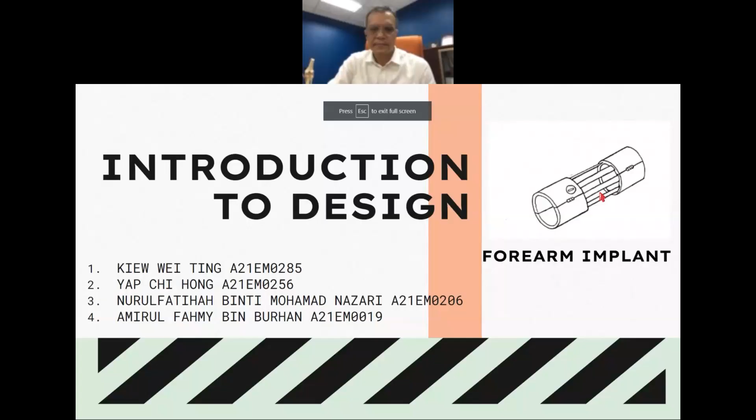Okay, so let's start. So this is our device for this project, which is a forearm implant. Our members are Kiew Wei Ting, Yap Chi Hong, Nurul Fatihah, and me, Amirul Fahmy. So next.

Okay. So for the production, we are going to design an internal fixator which can be used by the people who need to recover their bones, especially at the radius part, the radius bone. The main purpose of the design is that people who have oblique fracture at the forearm bone radius can be healed as soon as possible and buy the internal fixator at a lower price.

So a broken bone must be carefully stabilized and supported until it is strong enough to handle the body's weight and movement. Until the last century, physicians relied on casts and splints to support and stabilize the bone from outside the body. The advent of sterile surgical procedure reduced the risk of infection, allowing the doctors to internally set and stabilize fractured bones.

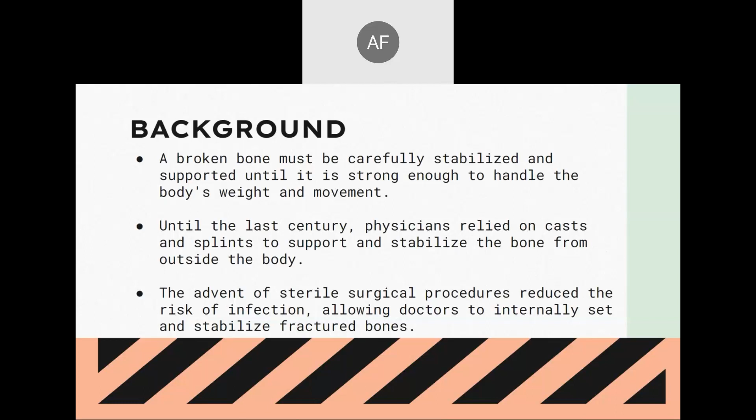Our objective is to conduct a design research on an internal fixator for oblique fracture at forearm, to understand the benefit of internal fixator for humanity, to learn the design of the internal fixator and its function, and to design a forearm implant with simple structure.

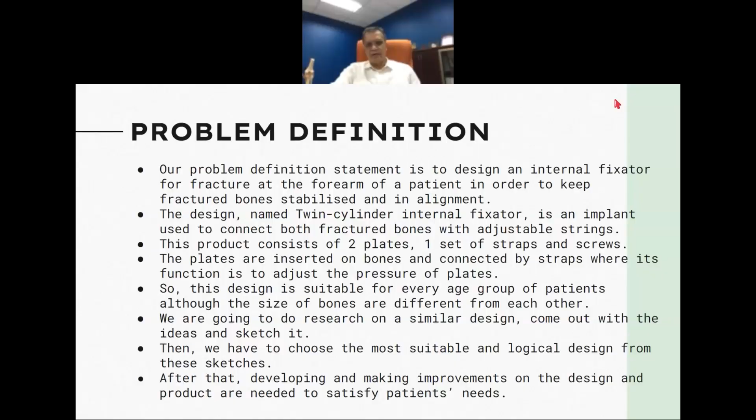Fahmi, my turn. Oh, okay. Problem definition is... Okay, can you turn on your camera to the presenter group? Okay. Sir, my line is bad. It's okay. It's okay. I hope others you can share your.

Yeah. Okay. Our problem definition statement is to design an internal fixator for fracture at the forearm of the patient in order to keep fractured bones stabilized and in alignment. The design named twin cylinder internal fixator is an implant used to connect both fractured bones with adjustable string. The product consists of two plates, one set of strap and screw. The plates are inserted on bone and connected by straps where its function is to adjust the pressure of plates.

So the design is suitable for every age group of patients, although the size of bones are different from each other. We are going to do research on a similar design, come up with the idea and sketch it. Then we have to choose the most suitable and logical design from these sketches. After that, developing and making improvement on the design and product are needed to satisfy patient needs.

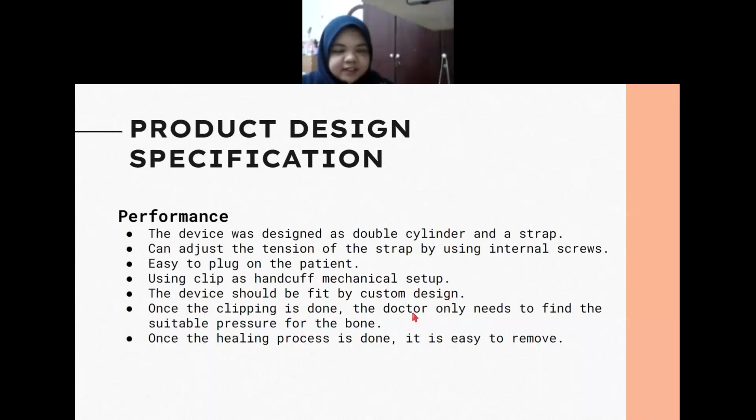Fatihah. Okay, next for product design specification. In the performance, the device was designed as double cylinder and a strap. It can adjust the tension of the strap by using internal screws, and it's easy to plug on the patient by using clip as handcuff mechanical setup. The device should be fit by custom design. Once the clipping is done, the doctor only needs to find the suitable pressure for the bone. And once the healing process is done, it is easy to remove. Next.

Okay, for product lifespan, we target that this product will last for about 3 years to stay on the market. And size for this product is 18 millimeter until 21 millimeter for diameter of normal adult bone, radius using magnetic resonance imaging MRI method, and 60 millimeter until 100 millimeter for each ring plate length.

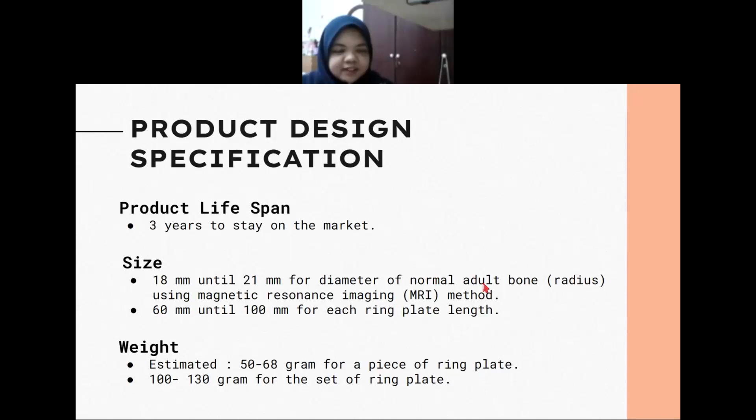And the estimated weight is 50 until 68 gram for a piece of ring plate, or 100 until 130 gram for the set of ring plates. Next. So the materials that we use is stainless steel for screw and strap, and titanium for strap because it's lighter.

For standard and patent, this product complies with standard ISO 13485 2016 Medical Device Quality Management System, and then ISO 19227 2018 Cleanliness of Orthopedic Implants. Third, ISO 14971 2019 Medical Device Application of Risk Management to Medical Device. And last, ISO 9268 1988 Implants for Surgery Metal Bone Screws with Conical Under Surface of Head. Okay, next.

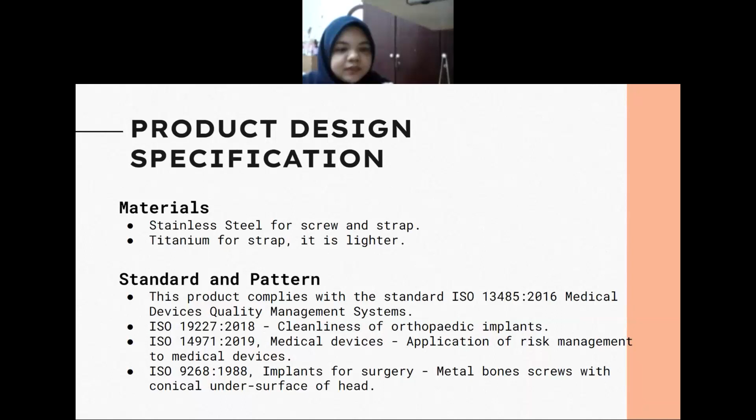Competition: locking plate system available in Malaysia is manufactured by GPC Medical and Siora Surgical. And service life, this product can last for 10 years and above. For the ergonomics, the design is made safe and suitable for human bones so that it's easy to handle, operate, set up, and store. Next.

For the safety, first, it will not harm the patient. Second, the material that we use is non-toxic to human tissues or fluid, and there are no sharp corners on the design that will hurt the human body. For the process, the doctor will adjust the strap to determine the right pressure on the patient's bone, and shelf life is the storage time without degradation. Okay, next.

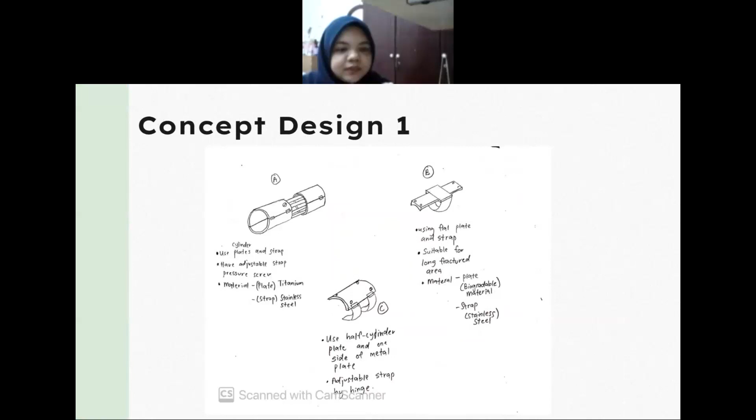For the morphology chart, we have 4 morphology charts, and the first morphology chart idea is from Fahmi, which consists of plate, connector, hinge, screw, and gear. And then he produced 3 concept designs, which are design A, design B, and design C. Next, morphology chart 2. The idea is from me, which consists of 2 components, plate and screw. And I also have 3 concept designs, which are design D, design E, and design F.

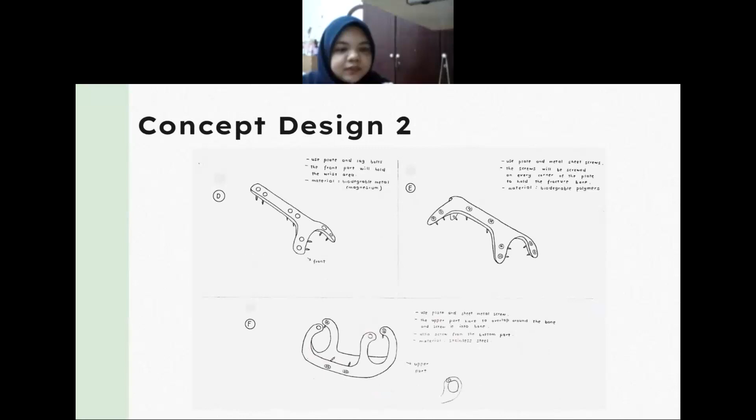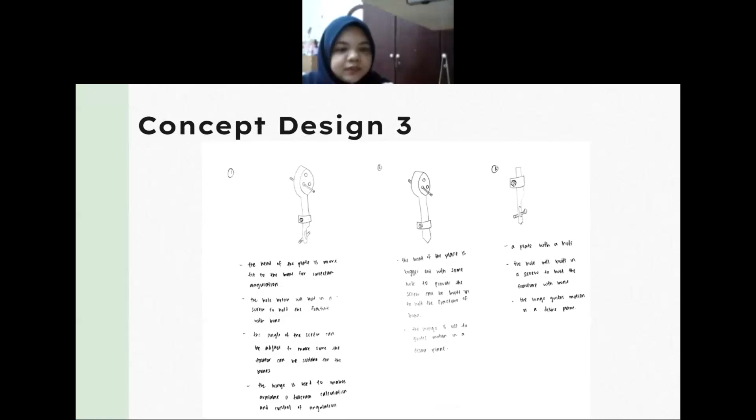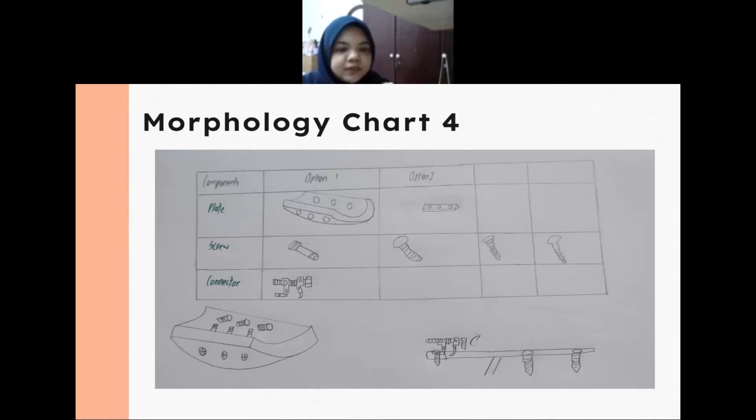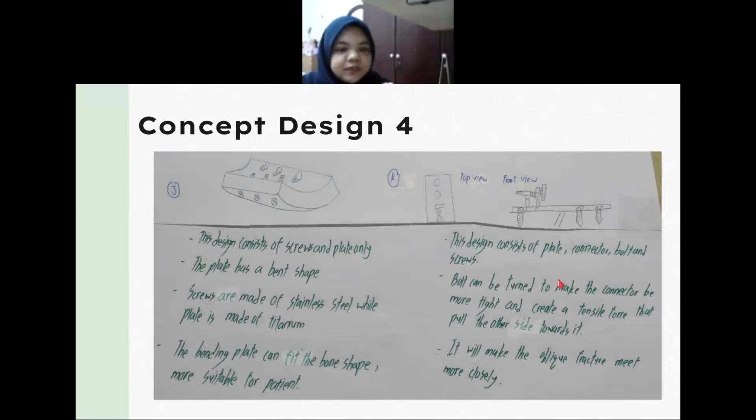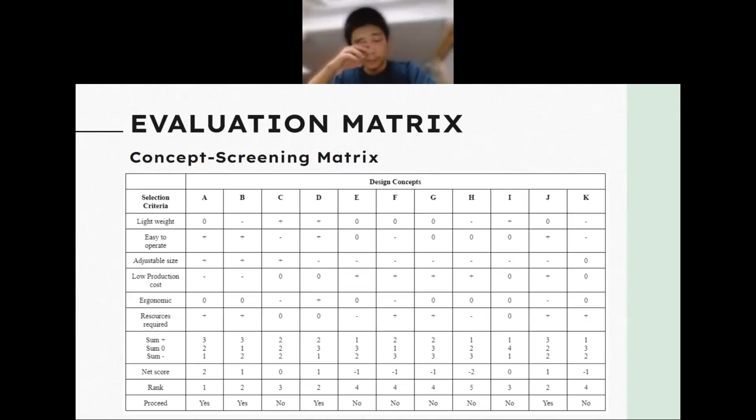Okay, for the evaluation matrix part, we have developed screening matrix and scoring matrix. For screening matrix, we have 11 design concepts in our group that need to be rated in these screening matrix, and the criteria used to determine our design ranking include lightweight, easy to operate, adjustable size, low production cost, ergonomic, and resources required. So finally, 4 design concepts are selected to proceed to scoring matrix based on their net score.

Okay, for scoring matrix, we give a higher percentage to the criterion adjustable size, because adjustable size is our design highlight. So we give 25% in rating the design. So we are going to develop design A from these scoring matrix based on its total mark.

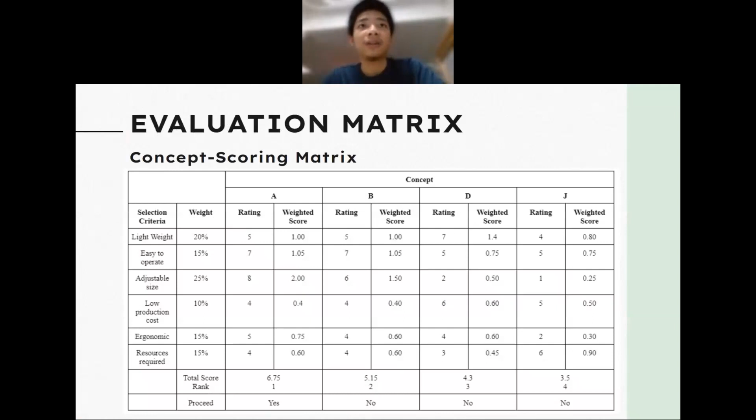Okay, next. The reasons why we chose design A are that the product is easy to operate and it has a strap that can be adjusted based on bone size. And this design looks stable when holding the bone until the healing process is done. And this product is made of material that is easy to find on the market, and it has high durability and is safe to apply in the human body.

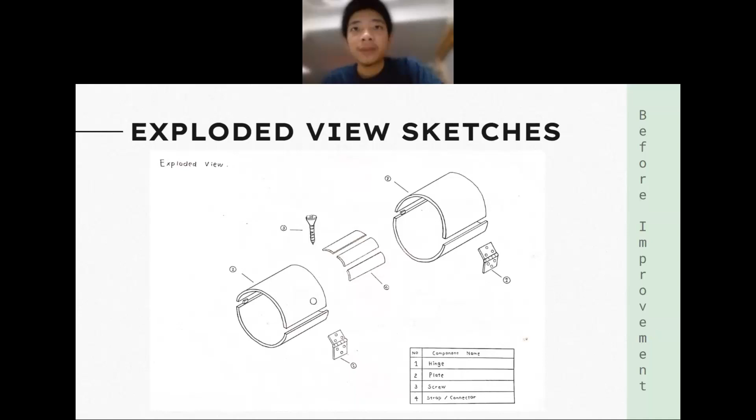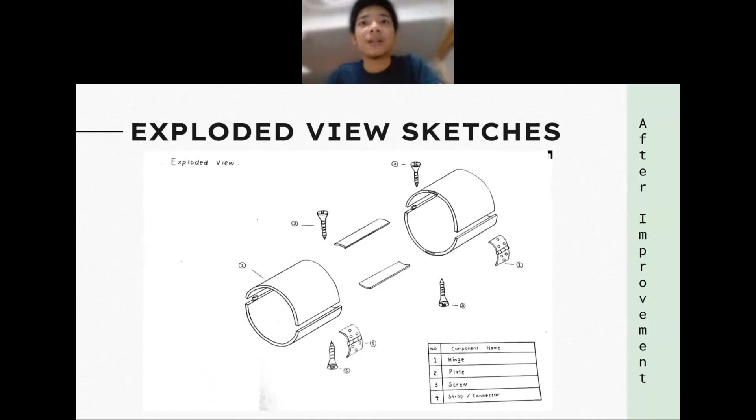This is an exploded view sketch after the improvement was made. The hinge became a curved shape, and we replaced the gear with just a simple screw used to fix the strap and the plate together. Okay, next. The strap is inserted into the plate and fixed by the screw. The quantity of screws used to fix the strap and plate is not fixed. You can add the quantity of screws you want to use, depending on the patient's situation. If you want to increase the stress, use more screws to fix it. Then there will be more stress on that strap.

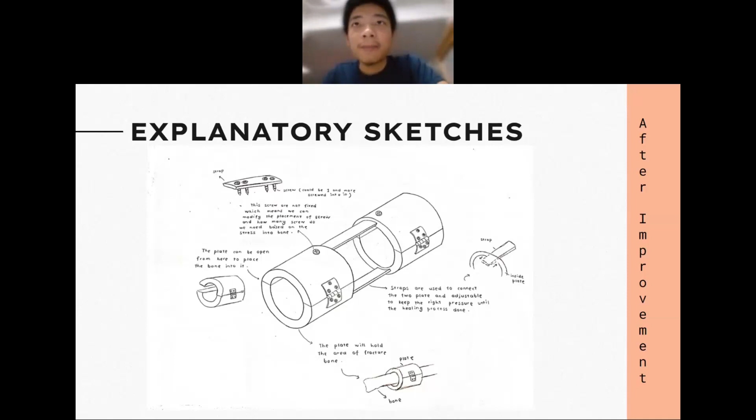Okay, next. I will pass to Fahmi for the 3D modeling part. So this is how our device works. First, before beginning the surgery, two straps are inserted into two plates and fixed by two screws. Then during the surgery, two sets of plates are used to hold the fractured bone. The size of the plate has been collected for custom fit, so it should fit the right size of the user's bone.

When the installation is done, the doctor will check the length of the strap inserted into the plate until they achieve the right measurement for the pressure. If the straps are too tight or loose, they need to unscrew the straps and adjust the length with the right tools, I'm suggesting forceps, and screw back the straps. So to reduce the stress on the bone, the doctor should decrease the length of the strap inserted into the plates, and to increase the stress on the bone, the doctor should increase the length of the straps inserted into the plates. Then the strap will be tighter and create a stronger force to pull both side plates. Increase the quantity of screws used to fix plates and straps, and hence the straps will be tighter.

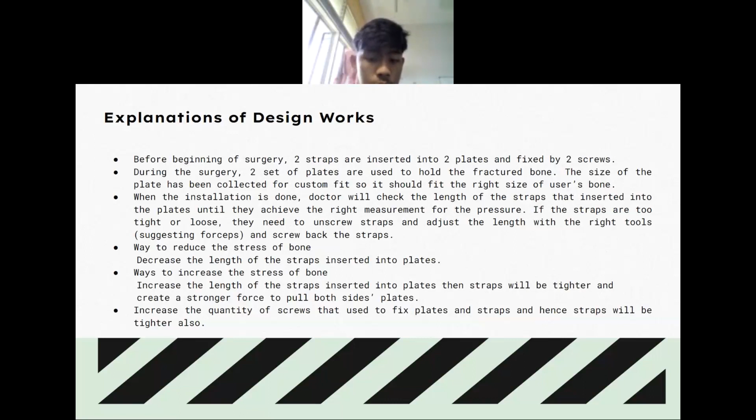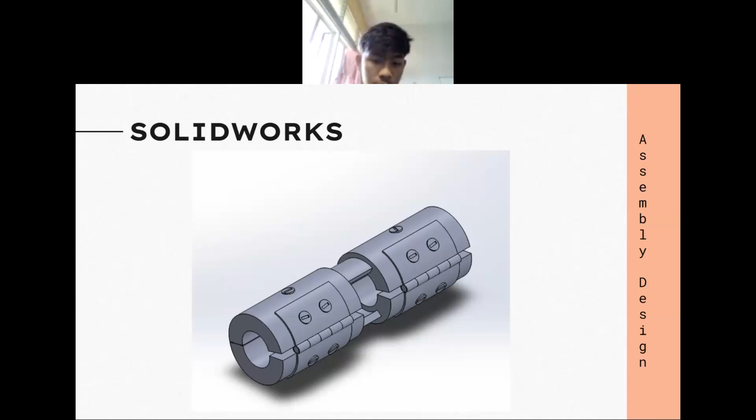Next. So this is the SolidWorks. As you can see, there are two cylinder plates, there's the hinge, and you can see there is a screw. That's the screw that holds the straps. So next, the isometric plan. So this is the exploded 3D modeling. As you can see, we insert the strap into the plate.

Yes, and then there is the screw. So next, to remind you, the strap is made like a chain, a watch chain strap. Our watch chain strap. So for SolidWorks, it is a bit difficult to make, but you can refer to watch chain strap on Google. So next.

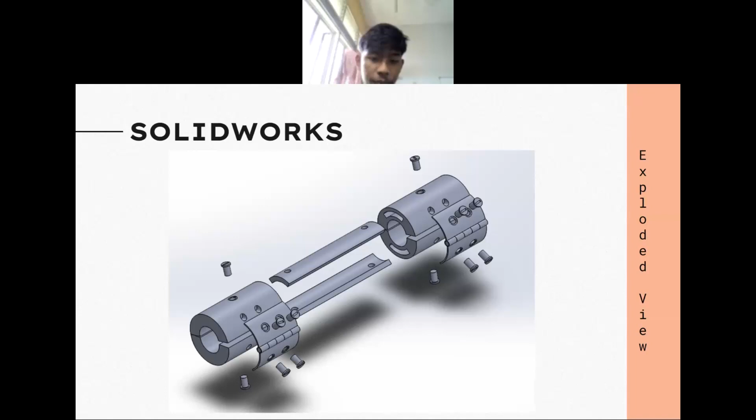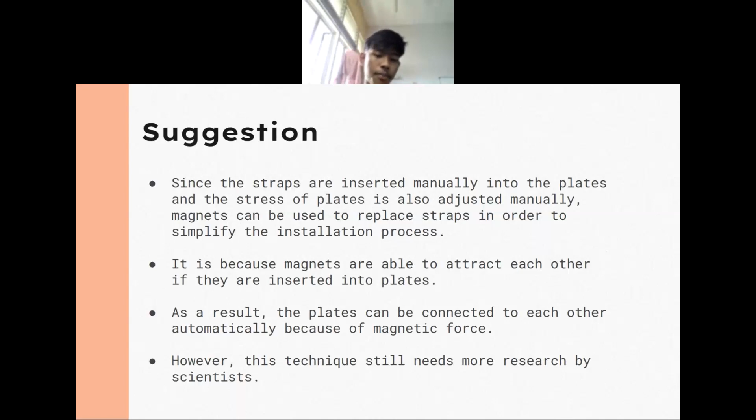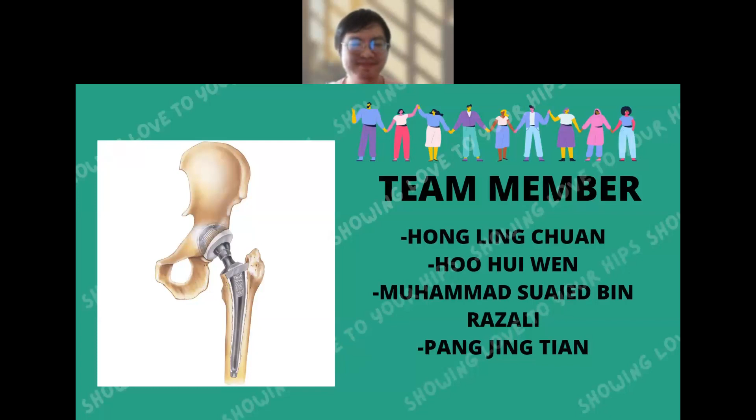We are from Group 2, and we are now presenting our major project for Intro to Design class, where our design will be doing total hip replacements, where we are always showing love to your hips. Our group members consist of me, Hong Ling Chuan, my fellow friends, Pang Jing Tian, and also Hoo Hui Wen, and lastly, our beloved Muhammad Suaied bin Razali. Next, our group members will explain what we have done in the project. So Hui Wen will take over. Thanks. Next slide.

Okay, so this is some introduction about our project, which is total hip replacement. So it's an internal fixation device that may be used to keep fractured bones stabilized and in alignment. The device is inserted surgically to ensure the bones remain in an optimal position during and after the healing process. They are held together with special implants such as plates, screws, nails, and wires.

So this internal fixation allows a shorter hospital stay, so the patient can be discharged earlier, and it also reduces the incidence of improper healing, which means healing in an improper position of broken bones. So next slide.

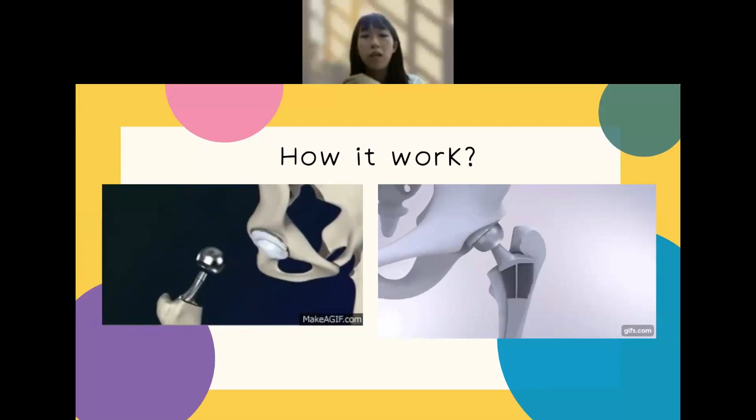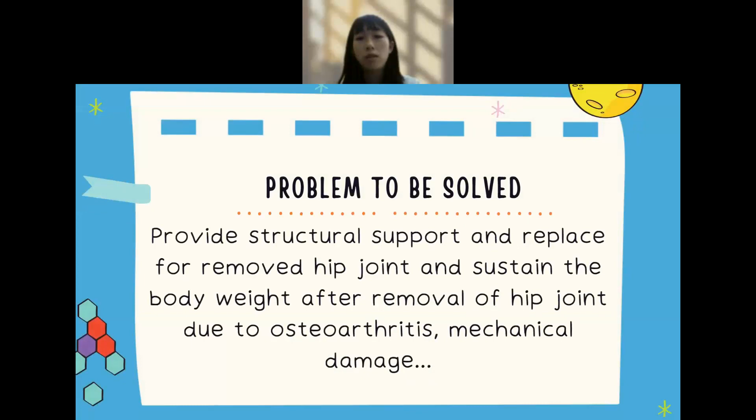So this is how it works. The left-hand side is how the surgeon inserts the implant into our pelvis. And the right-hand side is how the implants function in our body, how the implants work in our body. Next. So the problem to be solved is to provide structural support and replace the removed hip joint and sustain the body weight after removal of the hip joint due to osteoarthritis or mechanical damage. Next.

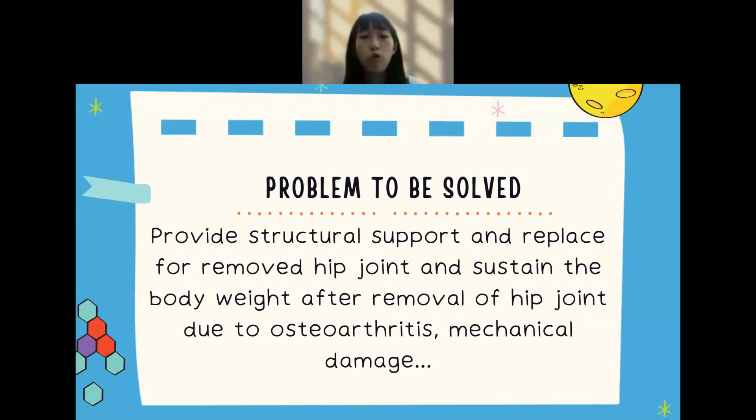And these hip implants are very important to us. So the first one is it can relieve your pain, because some of the patients have tumors over their pelvis or they have old cartilage. So this will make quite big friction on their bones, so they feel pain. But with these hip implants, they can relieve the pain. The hip replacement can provide a dramatic reduction in pain.

And the second one is improved mobility and hip function. So this implant allows you to get back to working without restraint, and it has a long-lasting effect also. So current evidence shows that 80 to 85% of hip replacements are still working 20 years after they were inserted. So this is a very long-lasting product. Next.

Because these hip implants were invented many years ago, a lot of related work has been done. The first one is the complex pelvis reconstruction using patient-specific instrumentation and a 3D printed custom implant following tumor resection.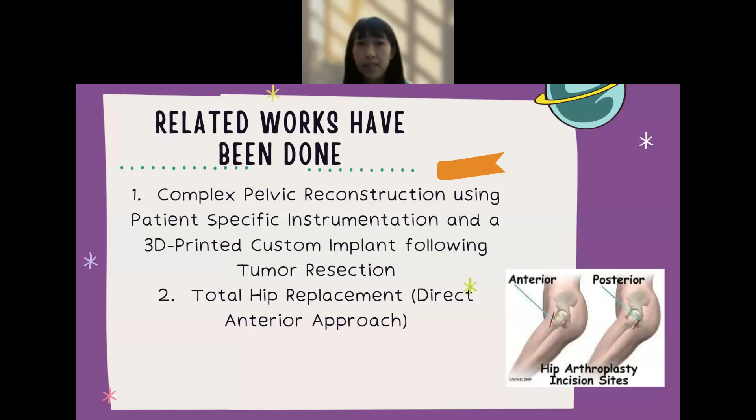Next. Okay, next we will briefly talk about our design, where our hip implant consists of four components: the acetabular component, the plastic liner, the femoral head, and the femoral stem. So what does each part have and what does it do?

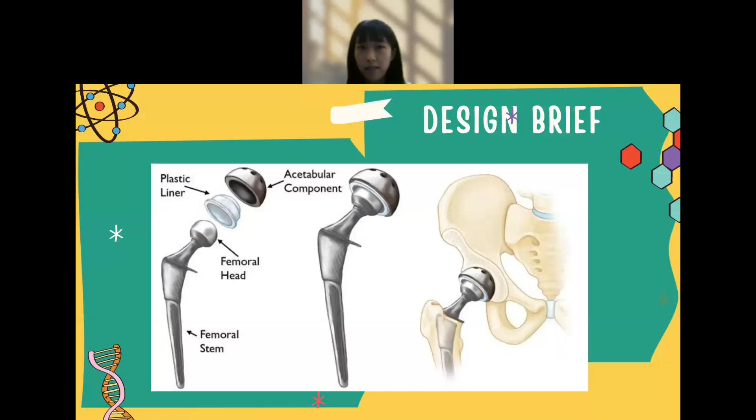The first is the acetabular cup. It has a porous coating that bone can grow into, and also has a locking mechanism to hold the liner. It also has holes on the surface to be filled with screws to fix the cup to the pelvis. Next is the plastic liner. The plastic liner acts as new cartilage in our body. The most common material is polyethylene, which is plastic, and some are made of metal or ceramic, but we chose plastic because it's more commercial, better and lasts longer.

Next is the femoral head. It is the ball of the hip joint and the second portion of the femoral side of the implant. It is made of a couple of different materials such as metal, like cobalt chrome, or maybe ceramics, depending on the situation. Next is the femoral stem, most commonly made of titanium because titanium is the most suitable and most commercially used biomaterial in biomedical areas. The stem can be implanted in a cemented manner, in which acrylic bone cement is used to fix the implant to bone.

Next, we use a titanium screw to fix the acetabular shell, or acetabular cup, in the acetabulum. It's not easy to corrode, with high tensile strength and corrosion resistance. Based on these characteristics, we use titanium. Next.

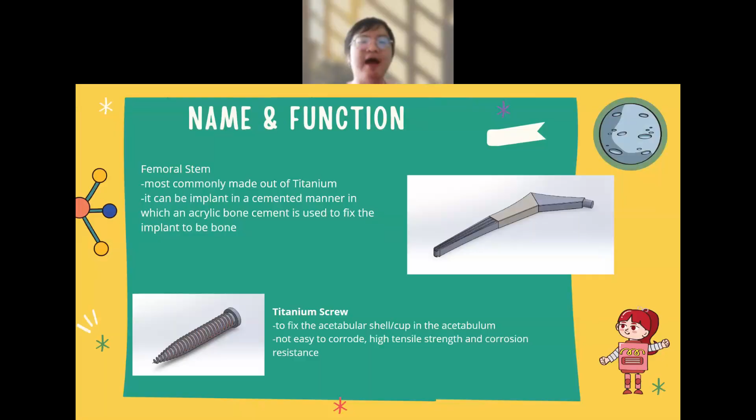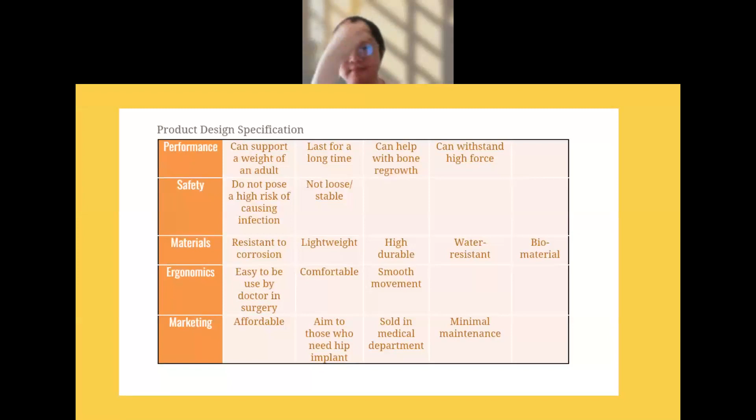In our design, we have some product design specifications. For performance, it must support the weight of at least an adult and last for a long time. It should also help with bone regrowth, because we want to help recover some of the bone that was lost during the surgery or the incident, and withstand high forces, not only the weight of an adult, but also friction forces when you are walking. Yeah, that's the force.

For safety, it must not pose a high risk of infection, so we are using material that does not corrode easily. It must be resistant to corrosion. Next, our product must be stable, not loose, or else the bone will shift and our leg will be in a weird, unnatural position. So we also use highly durable, weight-bearing biomaterials to ensure the bone is stable at the same time.

Next, for ergonomics, since the hip implant is an internal fixture, we want the doctor to be comfortable using our product and find it easy to use. As for the patient, it will be comfortable, just like replacing old bones with new ones, without a weird machine-like feeling as a replacement in our body. So we aim for smooth movement that doesn't feel mechanical.

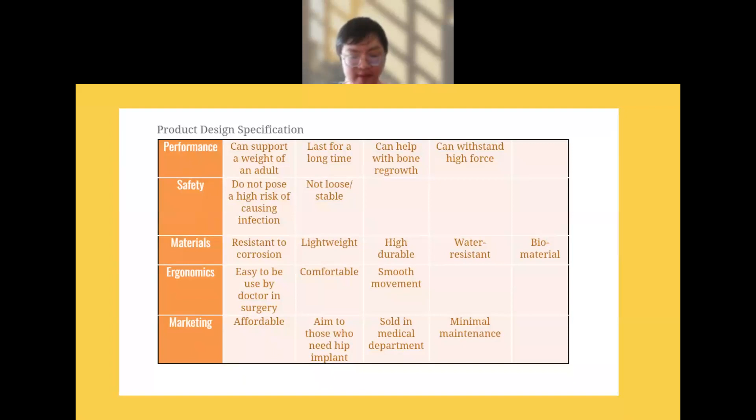Then for marketing, we aim for affordable prices for average families, so we are aiming for lower prices, not too high.

We also aim for minimum maintenance, because our hip implant is meant to have a long-lasting effect. We don't want maintenance needed every 2 or 3 weeks, or every few months. So we make sure our product is safe, without needing maintenance every few months or years, which also lowers the maintenance cost.

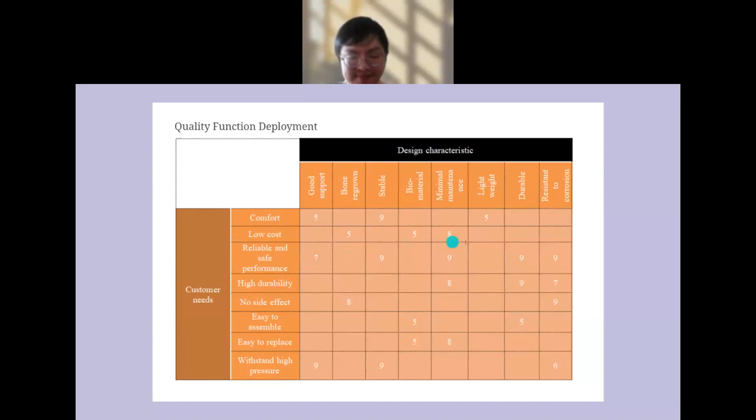Hi, I'll continue with the morphology chart. As you can see, we included 11 design combinations. We have a total of 4 parts, and for each part we have different designs, diameters, and materials. Here you can see designs 1, 2, 3, 4, 5, and 6.

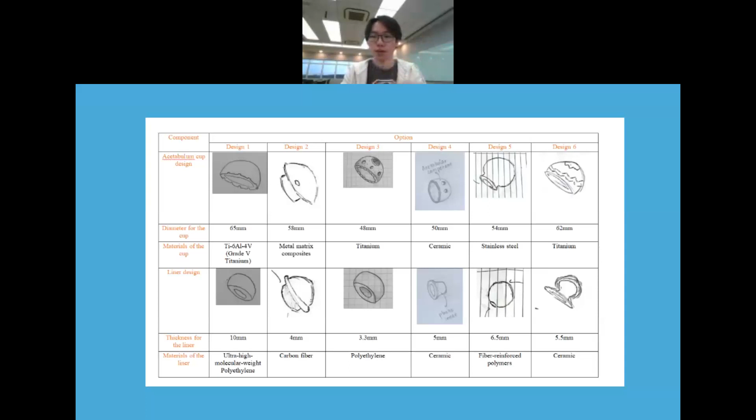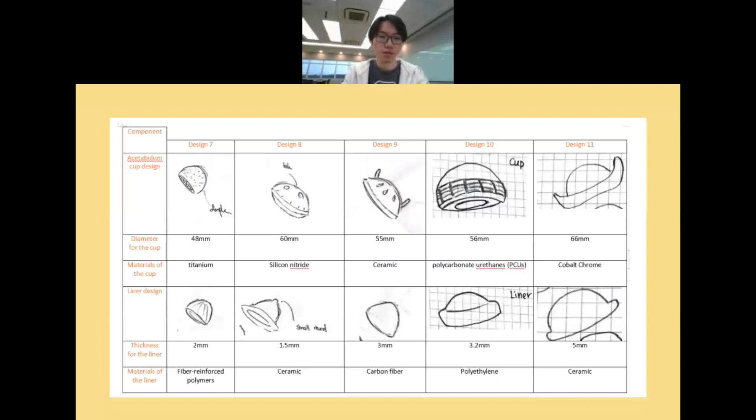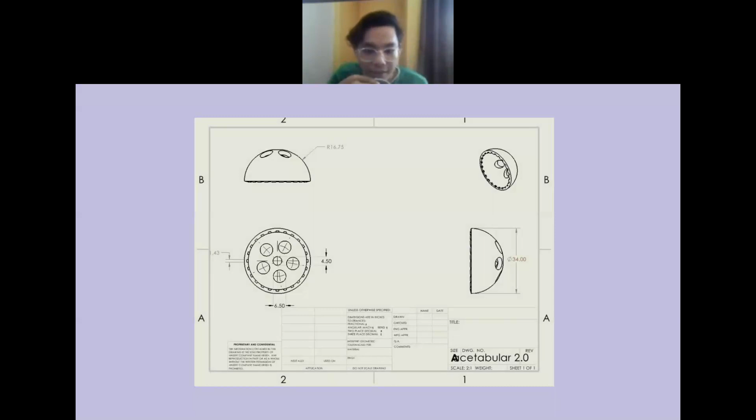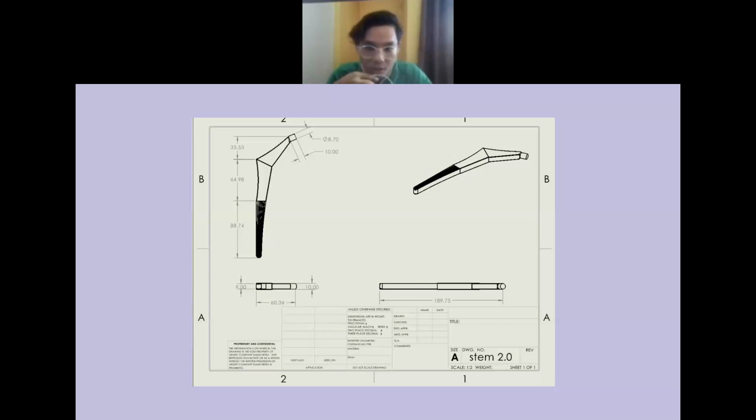This is the acetabular measurement. These are the liner, this is the head, and this is the femoral stem. This is the last one, the screw. So we use 5 components in our hip implant.

This measurement that we already decided on has been fitted with the real bone, and it is suitable to be used. Next.

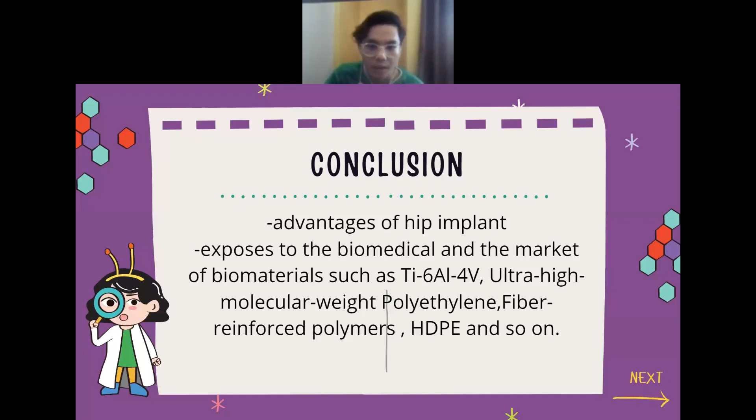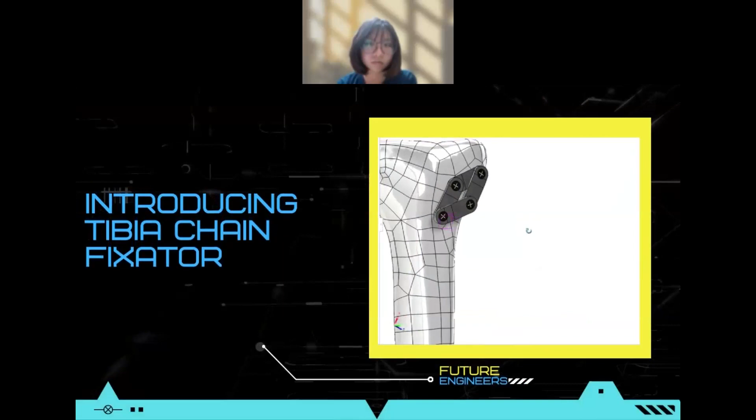Introducing tibia chain fixator. This fixator fits any type of tibia fracture. Most available products tackle only one type of tibia injury. They have limited length and parts are sold separately. They have limited shape, size and limited range of users. Tibia chain fixator is simple and safe, lightweight, can tackle all types of tibia fracture, and has adjustable length. It can be shaped easily, installed to anyone, and tackle all types of tibia fracture. It is also made of safe material for the human body.

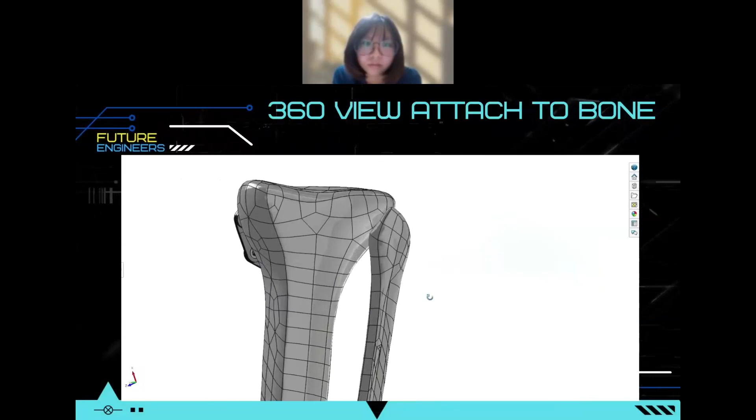And so this is our video presentation, and now I will share our slide presentation. Good afternoon, everyone, good afternoon to Sir and all of our fellow friends. We are from Group 4. Allow us to present our design, which is the chain fixator. So I proceed our presentation to Zaidatul.

So as the introduction, this is the internal fixator. There are various types of tibia fracture, divided into 5 to 6 different parts. For tibia fracture, the most common classification is the Schatzker classification and the Hohl and Moore classification. Due to their different conditions, the installation for the internal fixator for these fractures are different too. In most cases, a specific fixator is for a specific type of fracture.

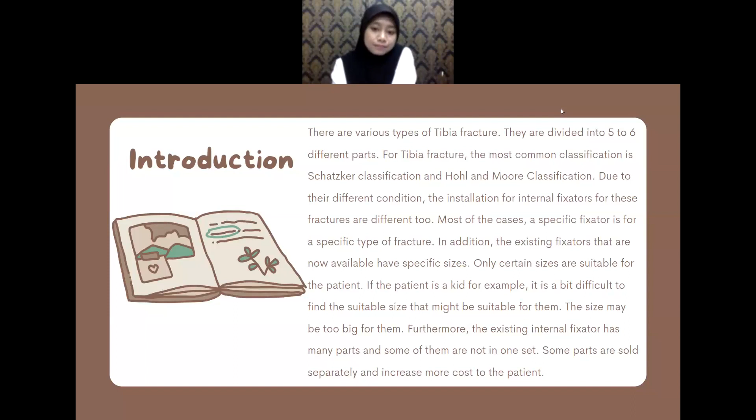So for the project background, first is the problem statement. What we find from the problem is that the existing tibia internal fixators have limited size, which is not suitable for every patient. The existing tibia internal fixators have fixed shape, and most of the fixators have complex parts, and they are only available not in one size and not in one set, and have their parts sold separately.

Next, for our objectives: first, we aim to design and develop an internal fixator that can be adjustable to any size and shape, suitable for any type of tibia fracture. Next, to develop an internal fixator that is simple and does not have complex procedures. Next, we aim to design an affordable and low-cost tibia internal fixator.

And we go to the concept development. At first, we have four important concepts. Firstly, of course, we need to have an affordable price. And then, of course, the material must be very durable. And then for our design, the plate must be thin and not affect daily life. And it also must have universal compatibility.

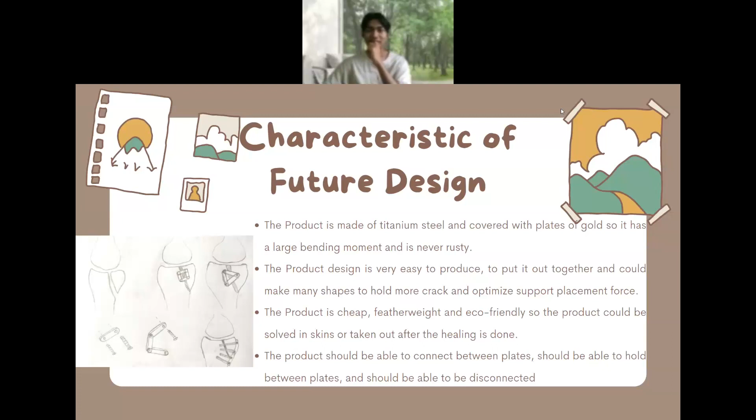And the product can be used on one-sided of bones or both sides. The strength of the product can hold up at least 3,800 Newtons before the medical plate collapses.

So the size and weight is for the normal product. Length is about 3.2 centimeters, or recommended to use with custom length according to the calculation for fracture by the physician. And the size of the product could get smaller as the product shape changes, and there is no limitation of the length or combination of the products. The thickness of the product is about 1.5 millimeters, and the weight of each plate from the product is roughly 8.3 grams, and different for custom review.

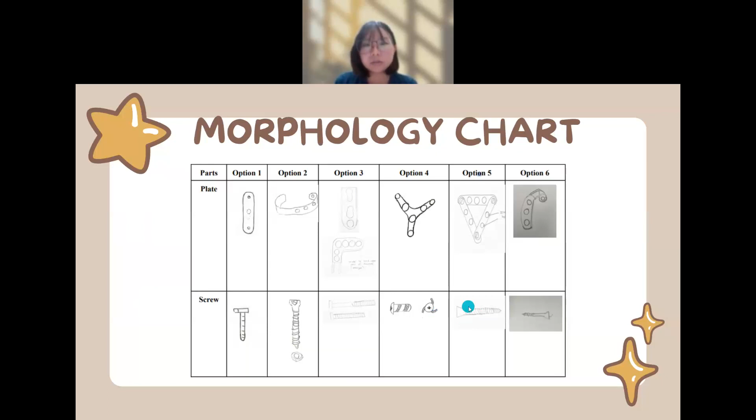Yeah, so for the final decision, we chose this product because it has the simplest parts to design, as that is what we targeted. This product is also very easy to build and very easy to install, as it does not have any sharp edges, and it also does not cause any inner or other side damage.

This product's weight can also be minimized by customizing the product. You can minimize the length of the product, so you can minimize the weight also. So you can tackle many types of tibia fracture because it can take many shapes as you want to support the fracture. It can be modified to any posture according to the fracture. It can be adjustable.

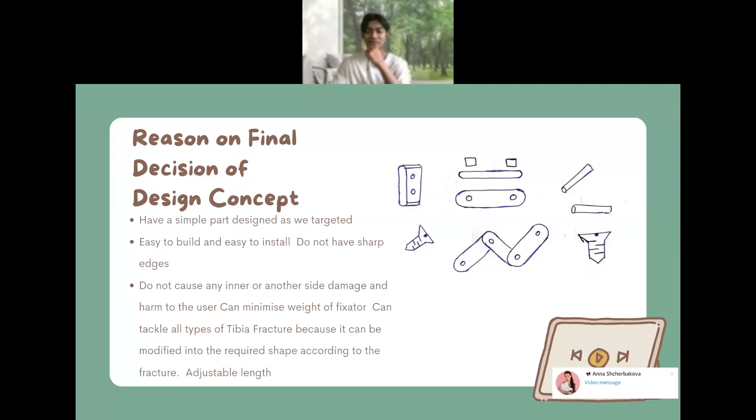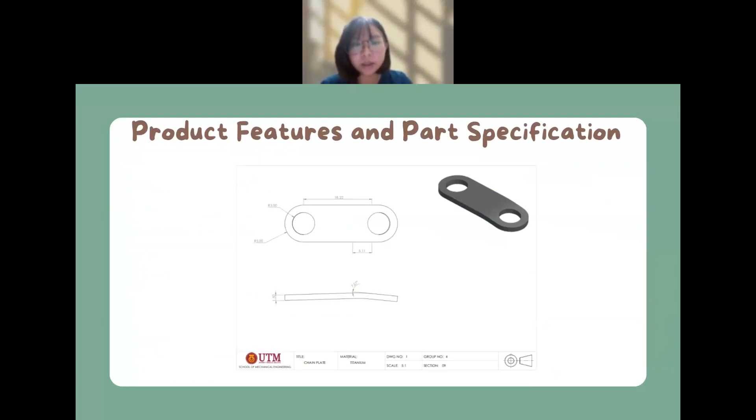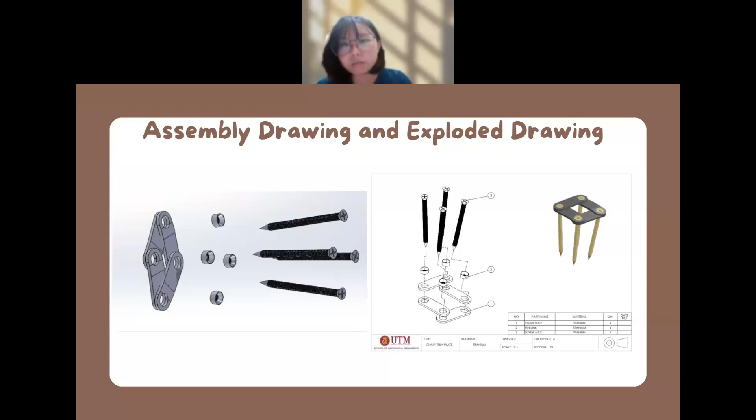And then for the mechanism: firstly, we put a plate on the bone to mark the holes for the plates, and then just drill the marks, and then we put the pin in the hole like in the picture. Then lastly, we just screw the plate. It's very easy to install. Next.

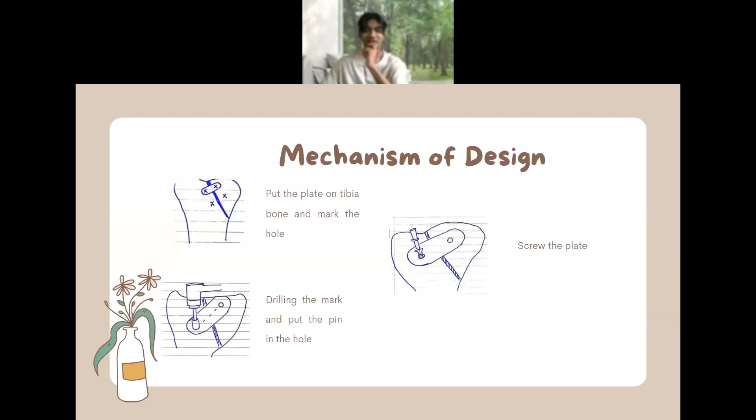So in conclusion, from what we observed and based on our reviews, we are sure that the objective of the project was successfully achieved. We aimed to propose a tibia fixator with less complexity that can be installed for any type of tibia fracture. We have also figured out many approaches to improve our invention and idea. We also discovered that this chain fixator is very handy and suitable for almost all patients, although they have different sizes. This fixator is not only for adults, but is also suitable to be installed on children.

We would like to thank our lecturer, Dr. Ardian Shah bin Shahrul, for the advice and assistance he gave us to complete this project. Furthermore, this project exposes students to how to take a proper approach to an existing product and how to identify the problem. When the problem is successfully identified, students were guided on how to find solutions and improvements correctly. Other than that, students were also able to learn more SolidWorks. All students had already learned how to draw in SolidWorks before, but in this project, students were able to sharpen their skill and knowledge of SolidWorks.

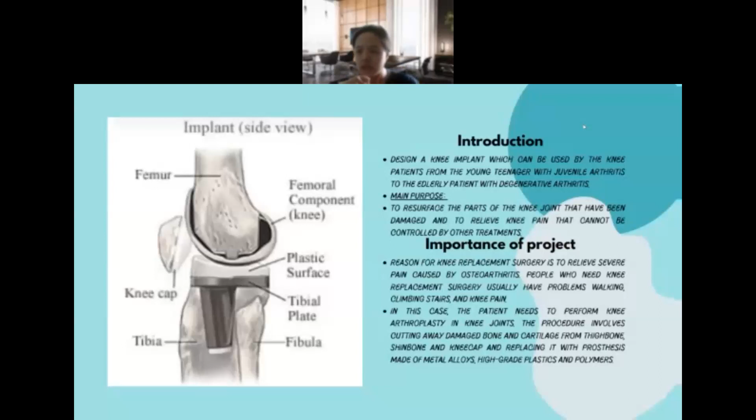So for the introduction: design a knee implant which can be used by knee patients from young teenagers with juvenile arthritis to elderly patients with degenerative arthritis. The main purpose of this knee implant is to resurface the parts of the knee joint that have been damaged and to relieve knee pain that cannot be controlled by other treatments.

For the importance of the project, the reason for knee replacement surgery is to relieve severe pain caused by osteoarthritis. People who need knee replacement surgery usually have problems walking, climbing stairs, and knee pain. The patient needs to undergo knee arthroplasty by cutting away the damaged bone and cartilage from the thigh bone, shin bone, and kneecap and replacing it with a prosthesis made of metal alloys, seen in the picture as the femoral component and tibial component, and high grade plastic and polymers, which is the spacer between the femoral component and tibial component.

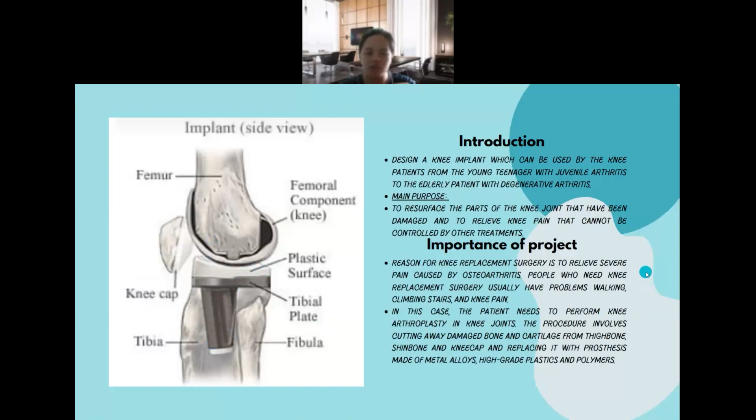So for the problem statement, we target the customer groups which are the individuals who are facing knee fracture and knee pain that cannot be controlled by other treatments. They require an implant to conduct daily activities, and the high cost of time and money to go back and forth from the hospital to treat the knee pain.

And the objective of this project is to design and develop an implant to aid the target customer group in their daily life activities. And also, we have to design an implant to resurface the parts of the knee joint that have been damaged and relieve the knee pain that cannot be controlled by other treatments. Lastly, to develop an implant that is affordable to the target customer group.

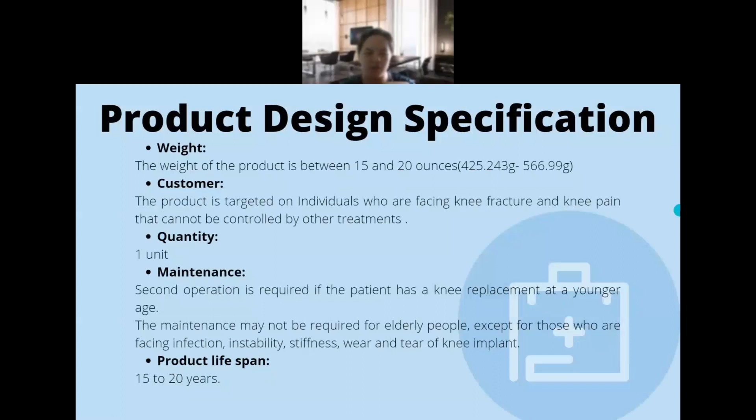Okay, so next we will move on to our product design specification. So first, weight. The weight of this implant is between 15 and 20 ounces, around 425.243 gram to 566.99 gram. So the product is targeted on individuals who are facing knee fracture and knee pain that cannot be controlled by other treatments. So the quantity of our product is 1 unit.

And for maintenance, a second operation is required if the patient has a knee replacement at a younger age, and the maintenance may not be required for elderly people except for those who are facing infection, instability, stiffness, wear and tear of the knee implant. And our product lifespan is 15 to 20 years.

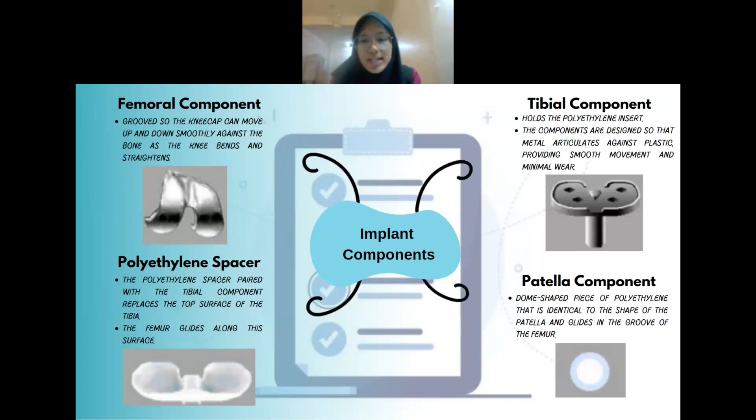So next, tibial component. It holds the polyethylene insert, and the components are designed so that the metal articulates against plastic. It will provide smooth movement and minimal wear. And lastly, we have patella component. The shape is a dome shape of polyethylene, which is identical to the shape of the patella, and it will glide in the groove of the femur.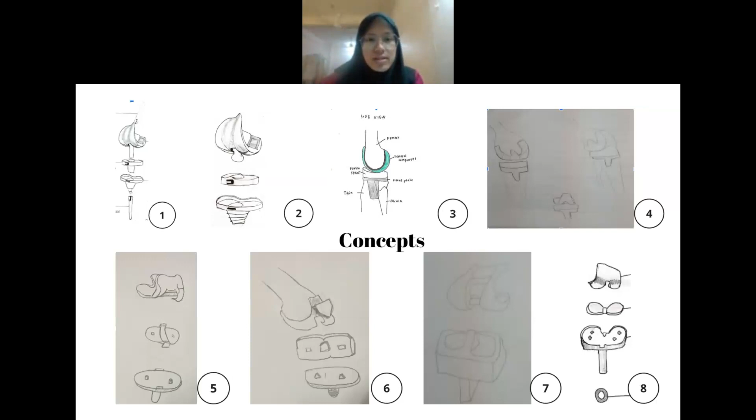So for the concepts that we propose, as you can see from the slide, we have 8 concepts. The first and the second one are proposed by Chia Liang Jing. The third and the 8th one are mine, the 4th and 7th are from Ng Chong Li, and lastly 5 and 6 are from Yosef. So next I will give to Ng Chong Li.

So our final design is concept 3 from Marisha. It has femoral component, spacer, and tibia component. And we add another extra component which is patella component. So the material for the spacer is plastic, which is polyethylene, and the thickness is about 8 mm. And the material for the femoral and tibia component is titanium, which is biocompatible to our body. And the weight of these 4 components is medium.

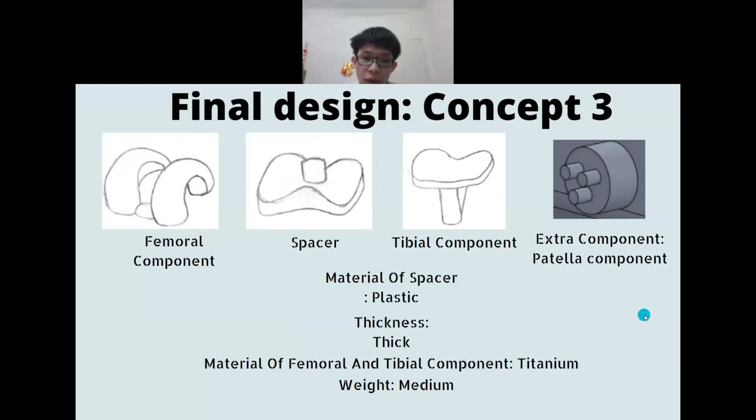This is our evaluation matrix. As you can see, we put our priority at lightweight and small size, with lightweight getting 15% and small size getting 20%. We also put our consideration at cost, which is 15%, and maintenance, 15%. So our design concept 3 got the highest mark, which is 4.3, and is ranked number 1 among our 8 designs. So I give it to the other presenter.

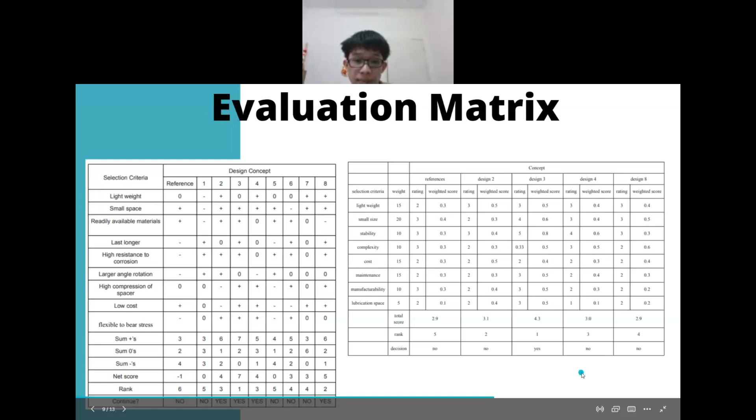Okay, now we will come to the product features. First of all, it's not rejected by the body, so it will be biocompatible. The product duplicates the knee structure it is intended to replace. The product is strong enough to take the weight and be able to lift the body weight. The product is also flexible, and the parts move smoothly against each other as required.

The product retains its strength and shape for a long time, so the patient is not required to change it frequently. The product can let the knee bend to around 120 to 125 degrees of flexion.

So the mechanism: first, prepare the bone. The damaged surfaces at the ends of the femur and tibia are removed along with a small amount of underlying bone. Position the metal implants: the removed cartilage and bone is replaced with metal components that recreate the surface of the joint. These metal parts may be cemented or press-fit into the bone.

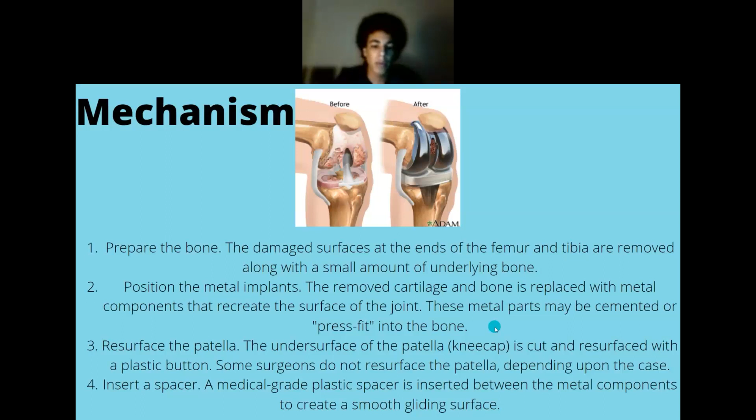Resurface the patella: the undersurface of the patella, the kneecap, is cut and resurfaced with a plastic button. Some surgeons do not resurface the patella, depending upon the case. Insert a spacer: a medical grade plastic spacer is inserted between the metal components to create a smooth gliding surface.

So as we can see, these are the prices we can find online in US dollars. For the femoral component, it's around 320 bucks, and the tibia component is also around 320 bucks. The spacer is around $125, and the last is the patellar component. It's around $55.

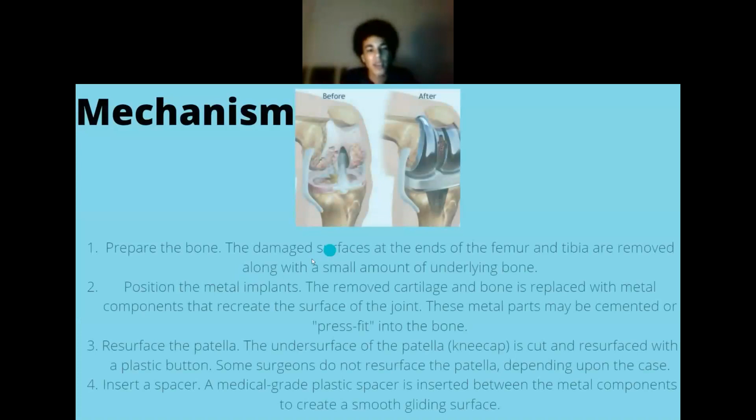But the shape of the patella is like, I don't know, there are 3 points over there. Yeah. I don't know where you put the patella, actually. You put it above the, let me check the name again, the femur component. Yeah. Okay, during the movement they will slide. It's not fixed. No, yeah, but it's still far. It's above, far from the spacer. I mean, when it slides, it will not scratch the plastic spacer.

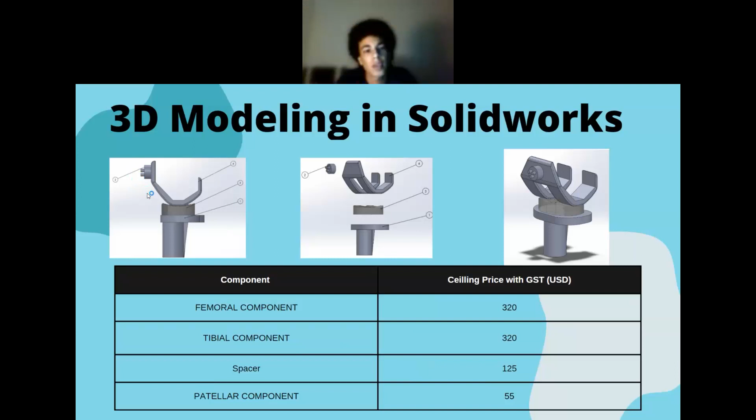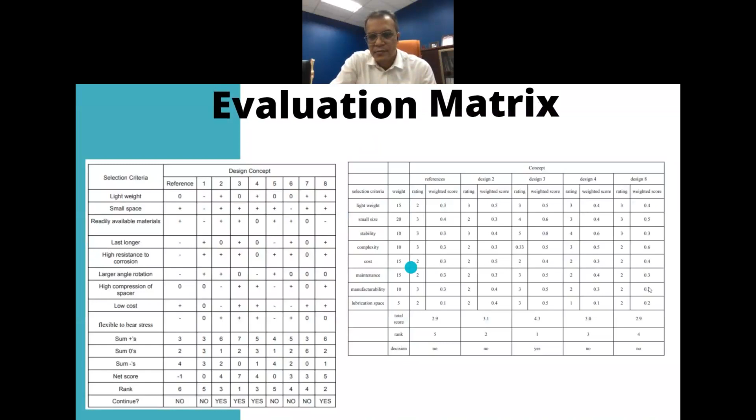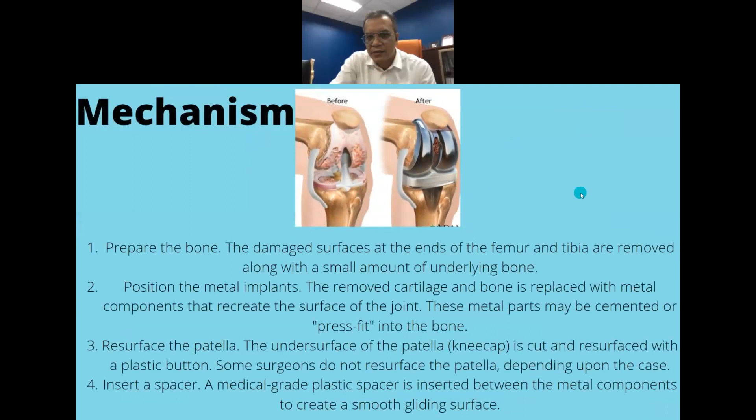Yeah, the patella is actually sliding. The previous slide, please. Excuse me. Previous, okay. Next slide. Another one. Okay, here. No, the previous slide, the one before. Okay, this. This patella actually slides in the middle. There is the curve. If you see, the shape of the patella is not straight. Yeah, it's not straight.

Yeah, you need to give the arguments why your patella is a flat surface, and where you want to put the patella, actually, which connection. That is what I try to encourage. If you just fix it to that position, I think it's not really correct. Oh, it was brought up by one of us, so we just took the idea and applied it, but we didn't think about it.

I agree you provide the patella, but you need to improve it slightly. Maybe you can see the shape of the patella, then how it slides to the knee. There is a curve actually in the knee. That is the point. It slides with that as guidance, also the guidance of the bones. Okay, that is a small input from me. I think you can improve whatever you can. After that, you submit the reports by tomorrow.

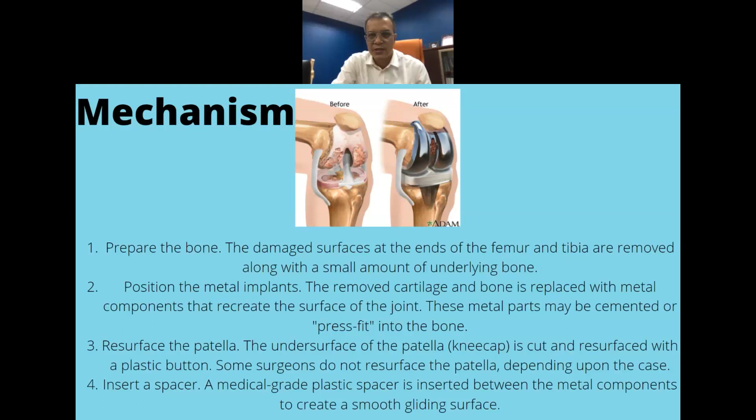Yeah. Okay, sure. The report you can submit by 11:59 p.m., so before 12 a.m. Yeah, before 12 a.m. Okay.